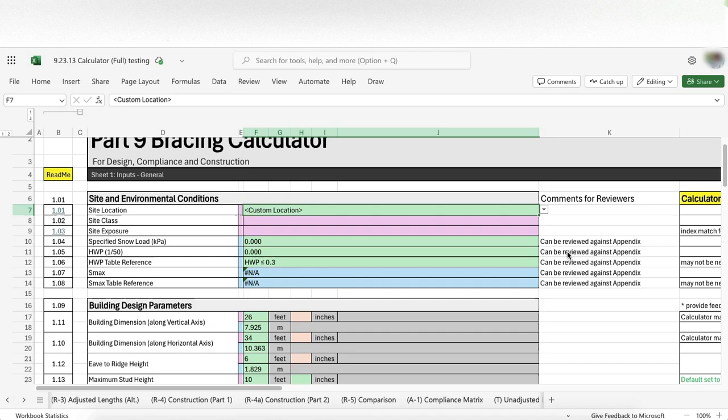The calculator I'm sending out for testing is going to be limited in some of its abilities for a few different reasons. I'll go through them as we get to it, hopefully it'll make sense. Basically, I'm trying to limit it so people can get a handle on the way it's working before I get into the more complicated logic. This is just a test phase, and please understand there'll hopefully be more options coming that provide more versatility to different users. So please just jump into it.

As I go through some examples here, I've already produced a demo version that I posted to YouTube last week. This video might be a bit more ad lib, and I'll go through some of the back-end data on how it applies to the code and some of my thoughts on these processes.

I apologize if it's a little long-winded, it takes a lot of my brain power to sit down and say all these things out loud, so thanks for your patience. I'd recommend, if you're comfortable with it, toggling to 1.5 or 2 times speed on YouTube so you get to the words a little quicker.

As I said, you're getting a test version, but it'll largely look like this. There may be some visuals that are different, recognize that it's a test version, and some cells might not fully make sense or be completely formatted, but I'll be working to clean it all up.

The general premise is there's a bunch of sheets down here that the user can navigate. There's the instructions and README - these are not finished and won't be finished on the test. You can take a look if you want, but there won't be much information there. I demonstrated that functionality in my previous demo, but haven't really built it out.

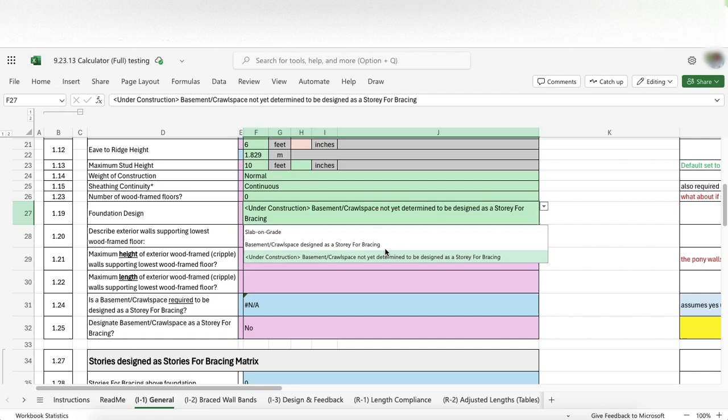So the logic is there, I've built it into the calculator, but in terms of testing before we get to this point, I'm just going to lock this all out, so you're not going to need to navigate through that just yet. You're only going to have two options: slab on grade, or the basement designed as a storey for bracing.

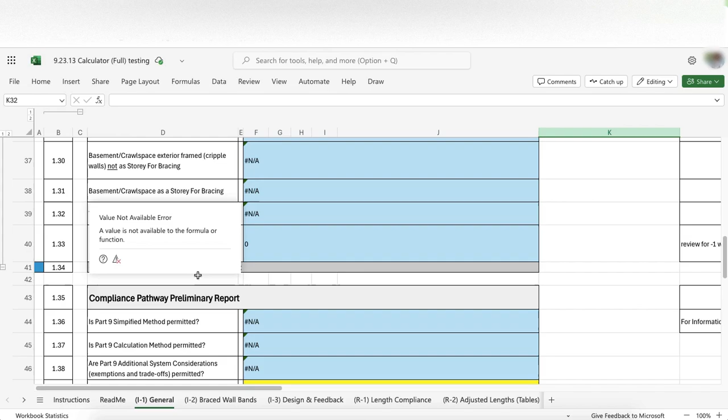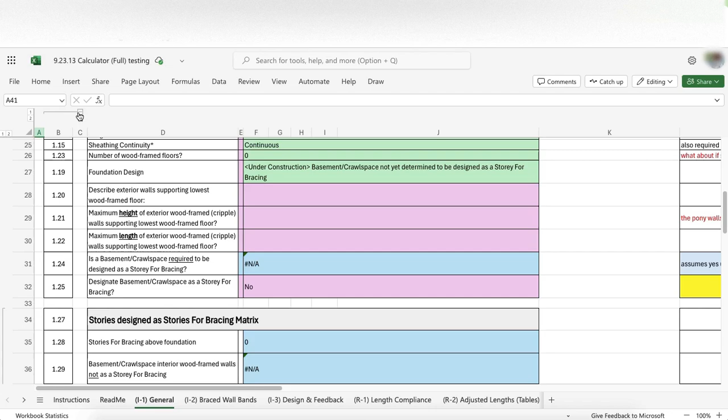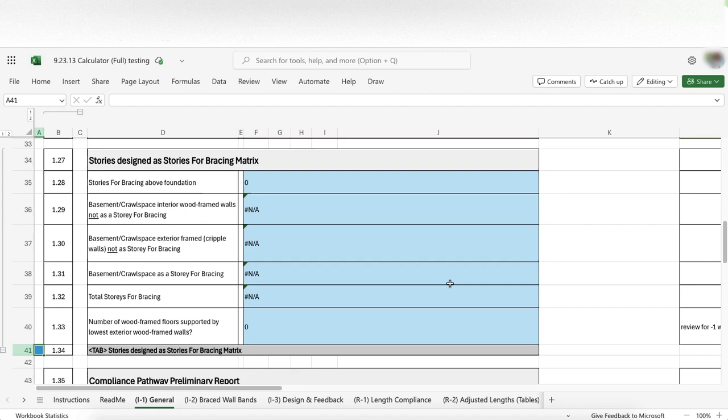You can check into all this stuff yourself if you like. As a general comment while navigating through the calculator, whenever there's a blue square like this, that represents a way that the cells can be condensed. This table isn't necessary for users to navigate through, it's helpful for understanding how the calculator logic works, so it's still available to see, but you can minimize it here and reduce it. That same thought applies on all the pages - if you see a blue square, there's usually a way for you to condense cells. I go through this at length in my previous demo, so I won't cover it here.

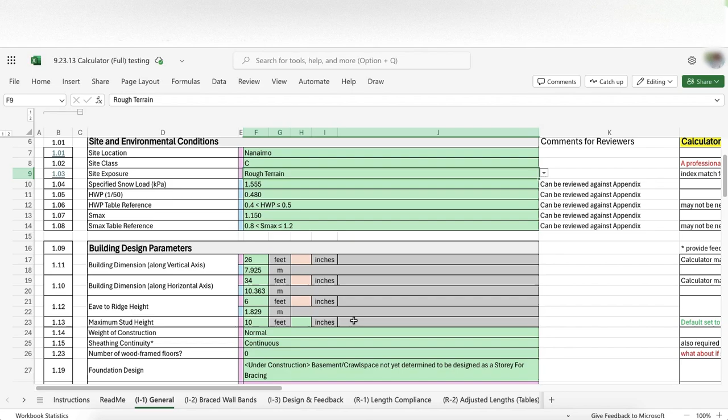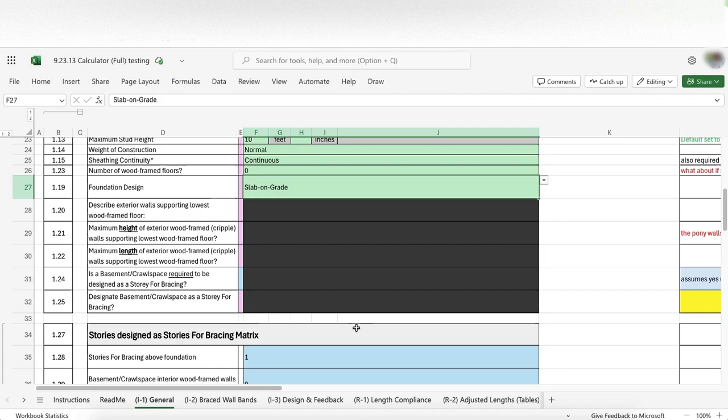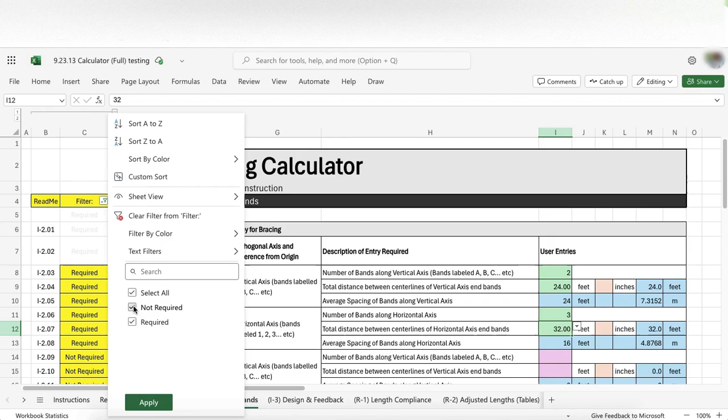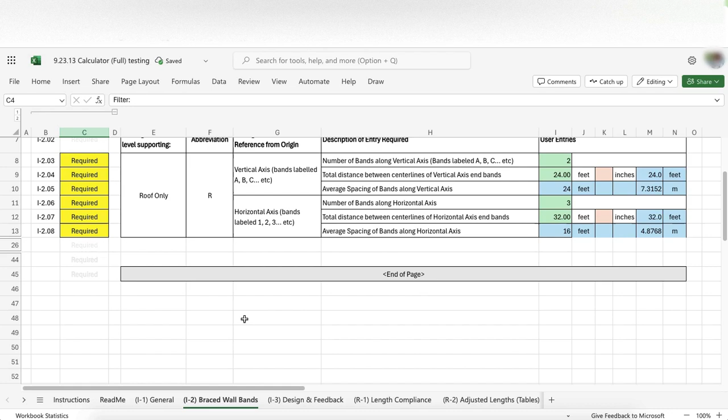So I'm going to keep putting through an example. I've already entered in some information here. Everything's blue or black, and I can see what compliance pathways I have available to me, so I can jump onto the next page. Again, I can apply this filter - I talk about that as well in the other demo. I've already entered in some information here regarding the number of bands.

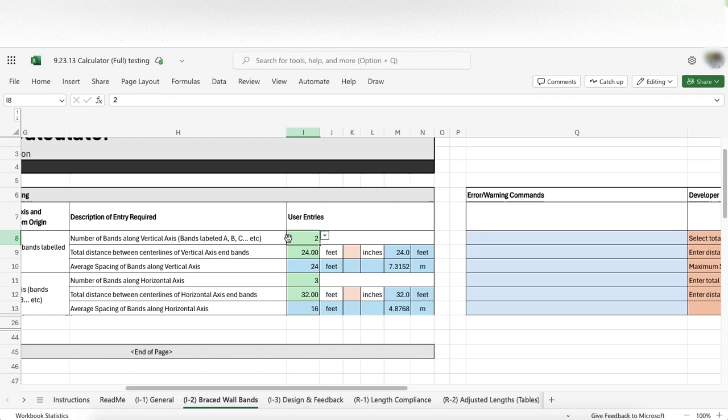I'm not sure if I have the functionality in at the moment. This isn't very well formatted yet, but if you're interested, think about these kinds of ideas as you move through here, because once the logic's written, it's pretty easy to provide this kind of feedback to a user. For example, in terms of the rules of 923.13, there are limits on the maximum spacing of bands, and it would be possible in the logic here - I think I've done it - to actually build this out a bit. So say we have two bands, but say I have 40 feet between the bands, I was producing an error notice here.

The maximum spacing for a band in the code is 10.6 meters for stories that are required to be stories for bracing. So it's possible to write in this kind of feedback for the user to get some immediate response. It's easy in this case - it didn't actually apply to my design, which is why it wasn't coming up.

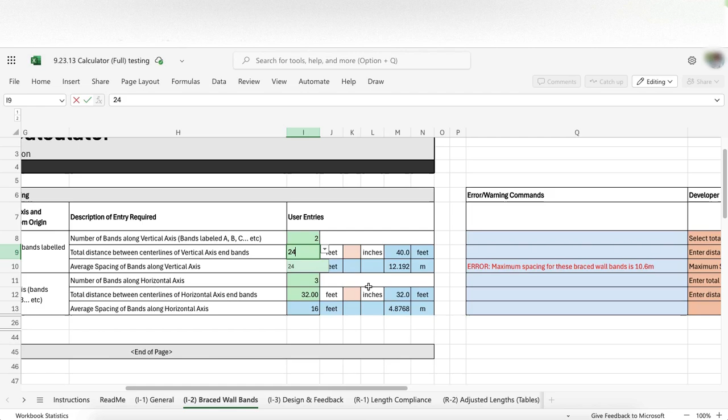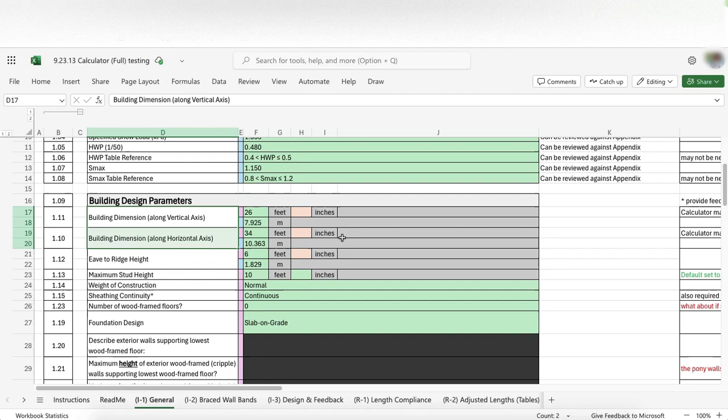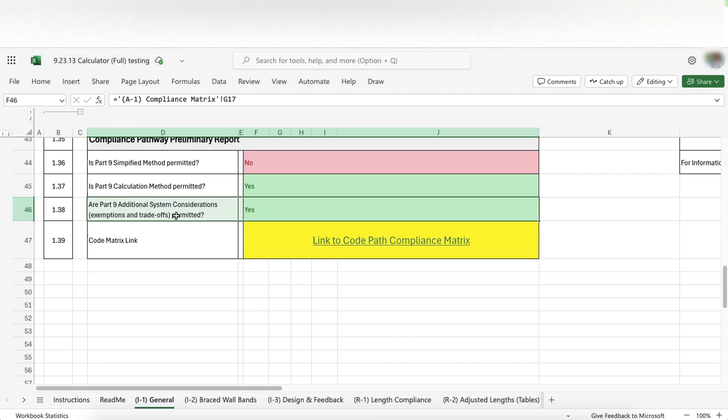Another thought I had - sorry, just jumping back to this page - when we talk about building dimension, there may be impacts on how we calculate building dimension, whether or not these additional system considerations are permitted to be used or not. So I would like to have some feedback that comes back to the user here regarding whether these dimensions should or shouldn't potentially include things like covered decks.

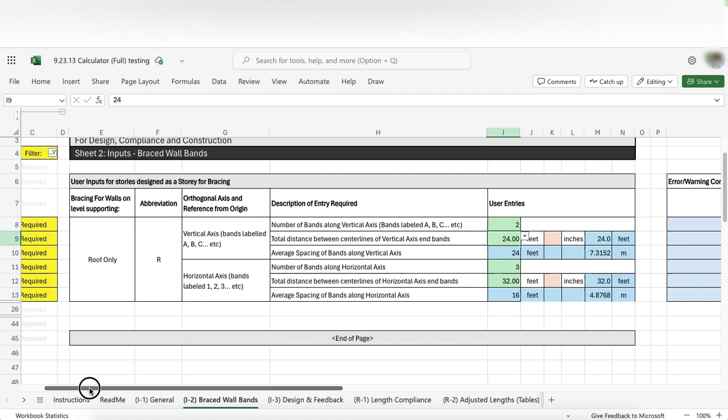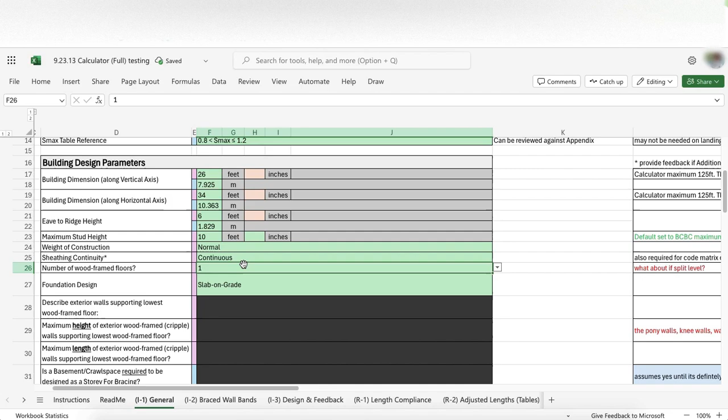Yeah, so again, once everything is green, we can keep progressing. I'll just let you know that if you're navigating sheet to sheet and coming back here, or reusing the same spreadsheet to produce a different design, keep in mind - say for example we're currently only designing for a roof only, but if I was to come back to this spot and change this from a one-story building to a two-story building, and come in here, because I've already applied this filter, the page doesn't automatically update for required inputs.

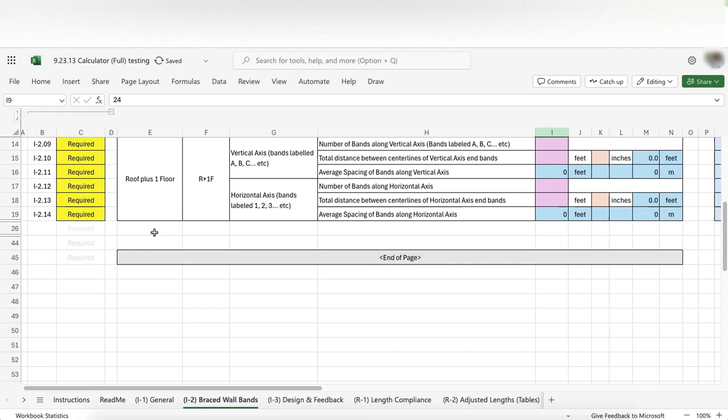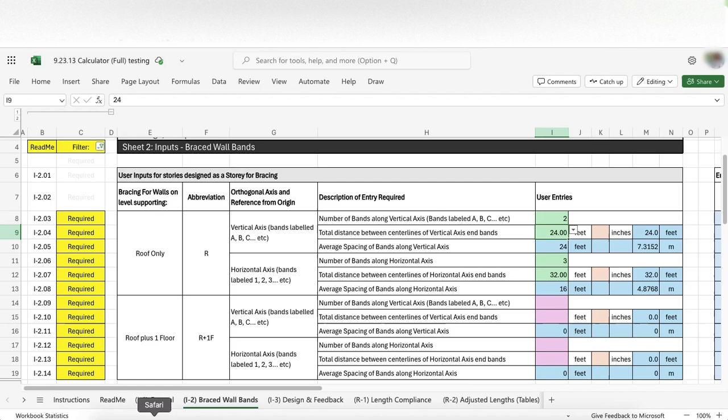So you would have to come back to unrequired, not required, sorry, and then back to required so that these fields became available to you. Just be cautious as you're testing things and playing around with it. My process is that every time I come to a page like this, if I'm not going through the process from the very beginning straight through, I'm always checking to make sure the required fields are becoming available to me. But I'm going to go back to change this to 0.

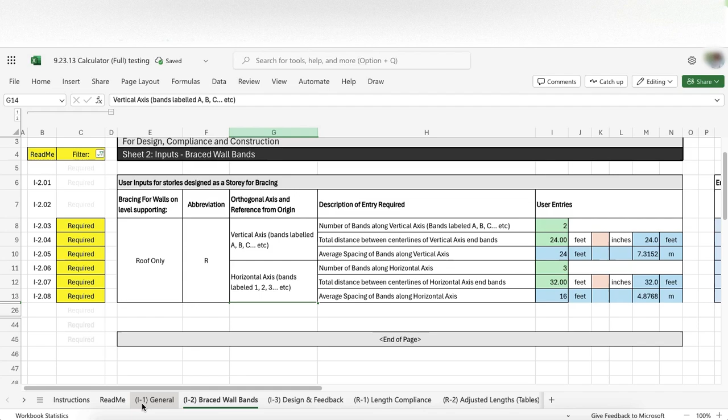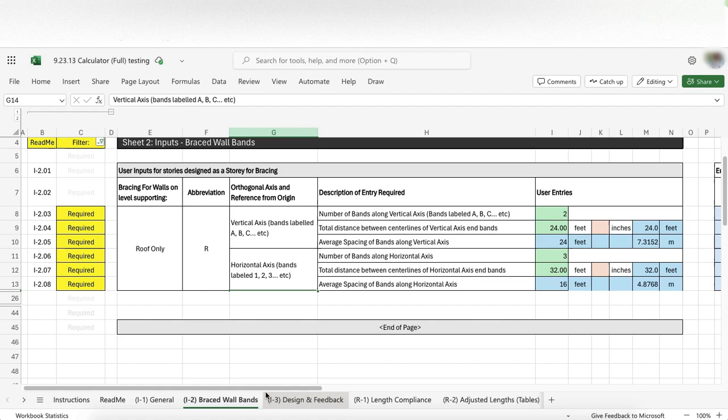So yeah, I'm all good here. I've got a pretty simple building in terms of its size and dimension. I'm going to go through to design and feedback. You see, I've already been playing around with this, so I've got a bit of information entered there. I'm going to do that same process again.

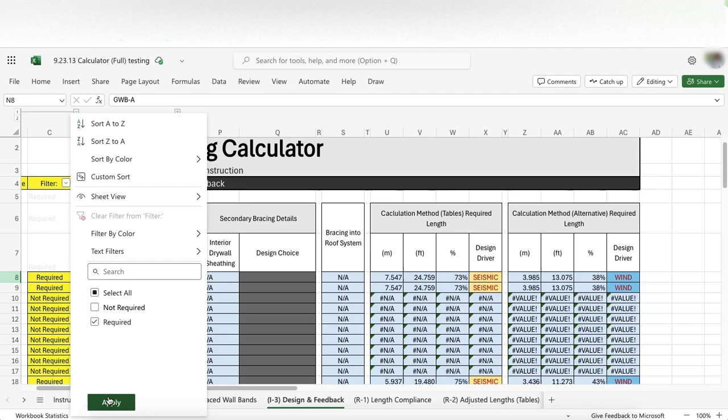And I'm going to delete all of these. I'm going to put these all in for starters as WSP-A. You can, and for some reason I have a hard time with it, but you don't want to do that. I don't know if it's just my mouse or my inabilities.

Something I just wanted to quickly show is, say you're producing elements of your design for the calculator to review here. Say for whatever reason you're getting a length that is insufficient for your design requirements, and you want to change this reference framing type. Or it could go otherwise - say you're trying to change this reference framing type, and you've already made a selection here. Say for example you change it from WSP-A to GWB-B.

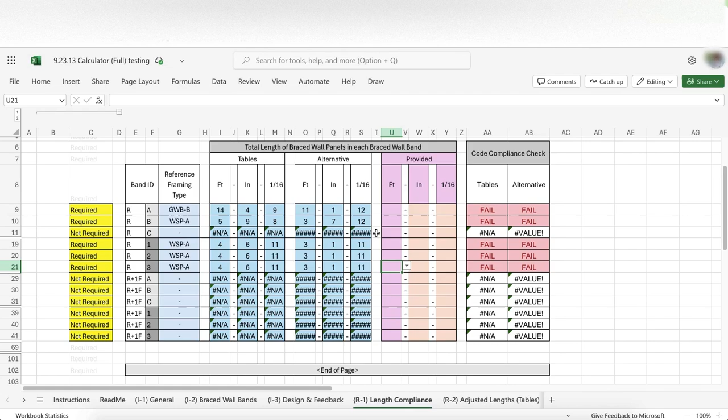This one was all pretty straightforward. Again, if you're interested, take a look back at the demo that I did to understand the intention behind this sheet. I will quickly say that...

Yeah, I think there could be merit - this provides for the overall total bracing in each brace wall band. I really think there could be merit in somehow splitting this up into another sheet for designers, where they enter in the length of each brace wall panel in a brace wall band. That logic is probably going to be pretty simple to devise. It could just be a helpful step where designers are putting in that information as they're reviewing their drawings in combination with the design.

If we have that information in the calculator, it will also be really easy to pull it out and export it as a report for builders, so that when their framers are on site and looking at a particular brace wall panel in a brace wall band, we'd be able to pull out specific information on the construction requirements. For example, based on the spacing for required anchor bolts, how many anchor bolts are required in that specific brace wall band, brace wall panel. The same thing could apply for nailing requirements for the sill, for example. There's a bit of information that could be pulled out that's already existing in the calculator, but we could apply it to very specific brace wall panels.

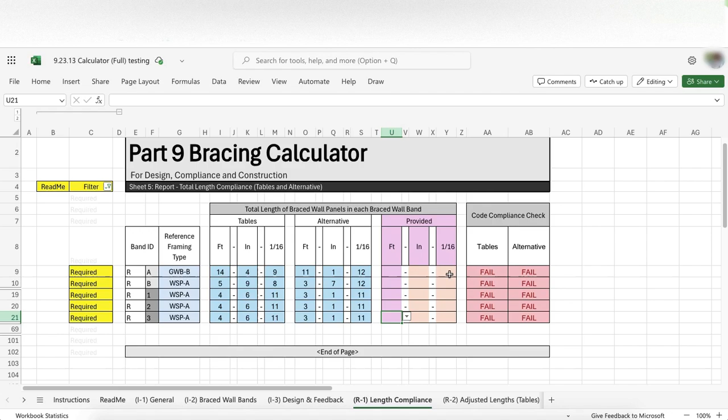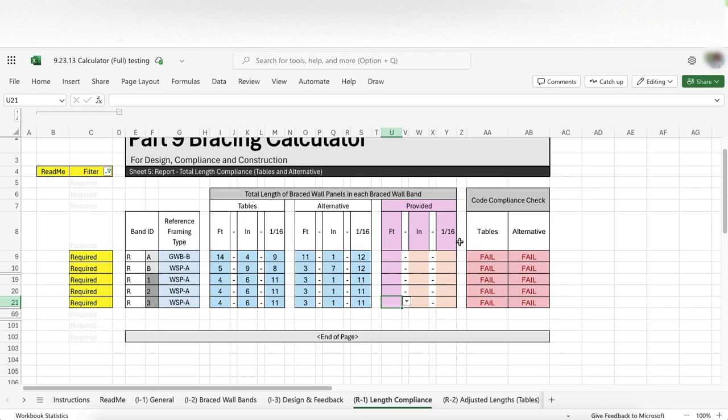Entering in the information here for the provided total bracing length in each brace wall band doesn't have any further impacts on the calculations. It's purely just for this table.

So now we're starting to get into some of the more technical information and reports. For those reviewing the technical aspects of this calculator, checking if it's actually producing calculations that truly reflect the values represented in the code, this is one of the pages that is going to be helpful, which is why I thought it would be most helpful for building officials, because that is essentially part of a plan review. The idea here is that the designer has entered in the information that is important to them. The calculator has queried the building code and the building code tables, and it is producing that information so that a building official could review it.

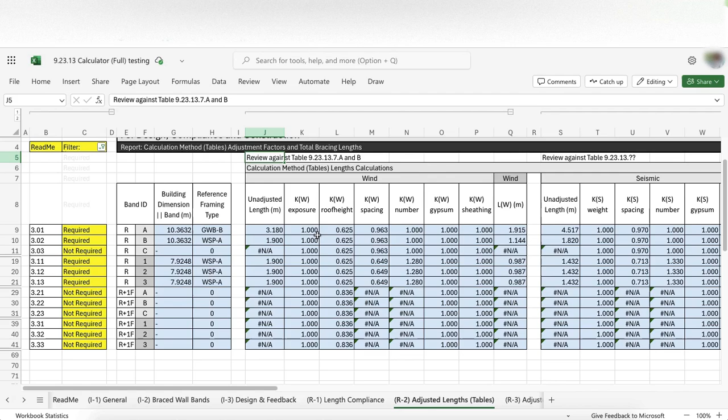Now, I've made a couple of notes here, and I'll probably leave them in for the test. But all of these values can be reviewed against the tables in the building code. There is interpolation that takes place for a lot of these, some of them not. But that's how, if you are testing this and you're curious about how effective it is, you're going to be thinking about these values in relation to the building code tables, and I'll jump into them a little bit.

I've written them up here. So this is the calculations for wind against the calculation method tables. The wind ones are represented in 9.23.13.7.A and B. These ones, I need to fill it in, but I believe they're C and D for seismic.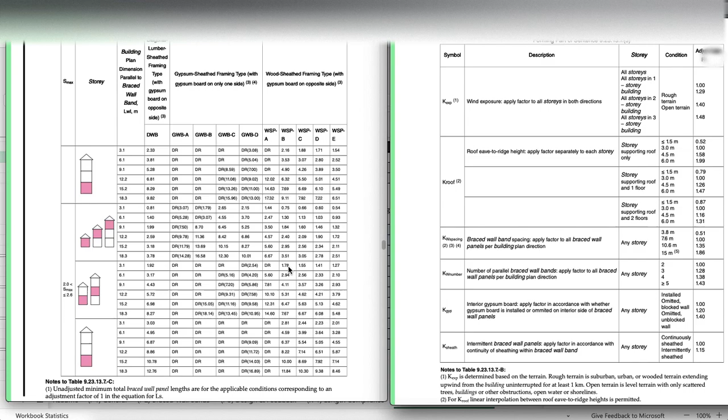And all these numbers, obviously, are a dense set of tables. You're looking, as you make a design or check a design, in terms of determining the unadjusted length, looking in these tables for values to use to determine that.

The same could be said for Table A, which relates to wind. It's slightly more simplified, but the same sort of concept applies. The reason that it's slightly more simplified is that the unadjusted minimum total length for wind does not have a factor related to the building length dimension.

So there's no variability based on building length dimension, because the forces developed by wind on a building are unaffected by a building length parallel to the bracing. Anyway, that's kind of long-winded, but it's just a simpler table in the end.

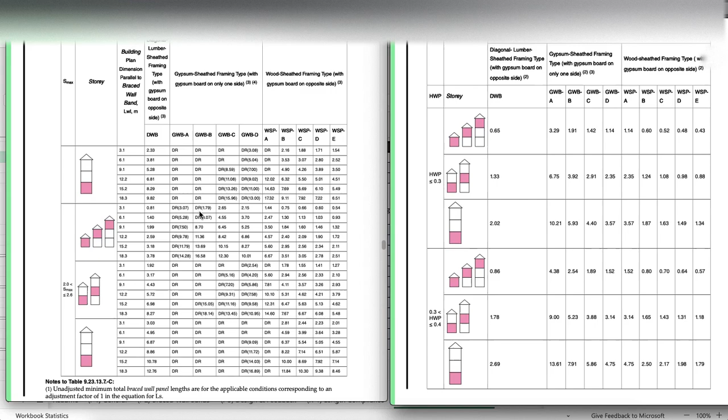Whereas for seismic, absolutely, the length of the building parallel to the braced wall band has a massive effect on how much bracing is required in that band. So yeah, these tables are more complicated, but they're all there, obviously.

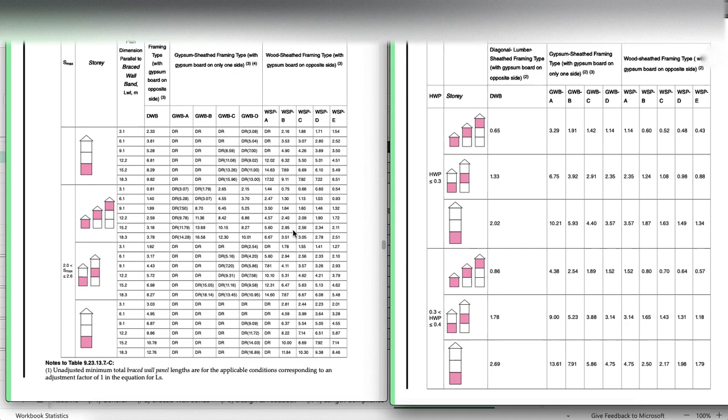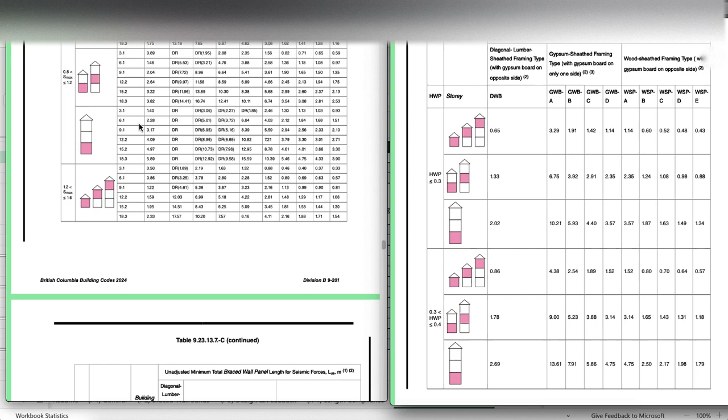For those testing it and wanting to see if the values that are coming back are accurate, we can jump into this a little bit. I'll do that right now. On our design that I'm demoing on the calculator, we have an S max value in the range of, I think it's 1.55. Just double check.

Sorry, just jumping back here. Yeah, so we have an S max value of 1.15, sorry. So we would be in this bracket here, right, with an S max value of 1.15.

The building that we've designed is only a single story, so it's only the wall supporting the roof, so it's going to be this set of tables here. And I believe I referenced WSP-A as the only reference framing type.

Okay, so single story, walls supporting the roof only. We've got our building dimensions parallel to the band, we've got our reference framing type, and we know our S max value, so we can jump back into the table. Here, we're now looking in here, primarily at this set of values. What the calculator is going to do for us is interpolate these values based on our building plan dimension.

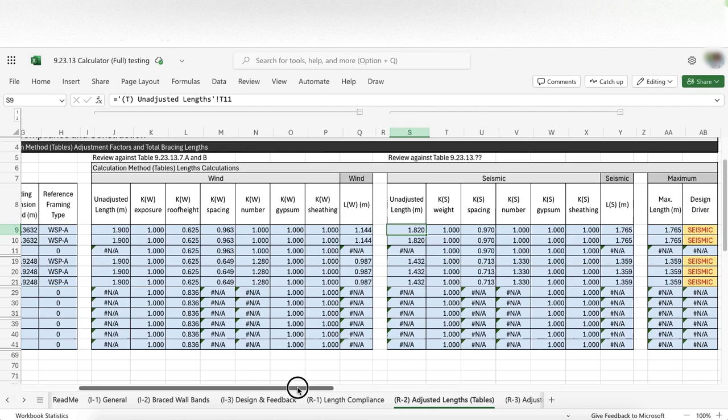And so, if I go over to here, that is what is coming back with our unadjusted length. Now, I should say, in this case, our unadjusted length. And again, we can even look at this in more detail if we're interested to check the calculations. So come through here, we have our table of unadjusted lengths.

This is back-end information that the calculator pulls out to help a user verify their calculations. I've made some adjustments to the building code tables you'll find at the end of the calculator, because there are ways to represent the logic of the tables that the calculator can understand. One of those ways is producing limits on the table. These don't actually exist as values in the building code table, so these numbers are a little bit different. Anytime I've done that, I've tried to italicize it to reference that there are assumptions going on to make it easier for the calculator to understand.

Let's take our first line here. As I said, our S max value is in this bracket for our tables. This is our band dimension, it's 10.36 meters, let's say. And we remember that we're using WSP-A.

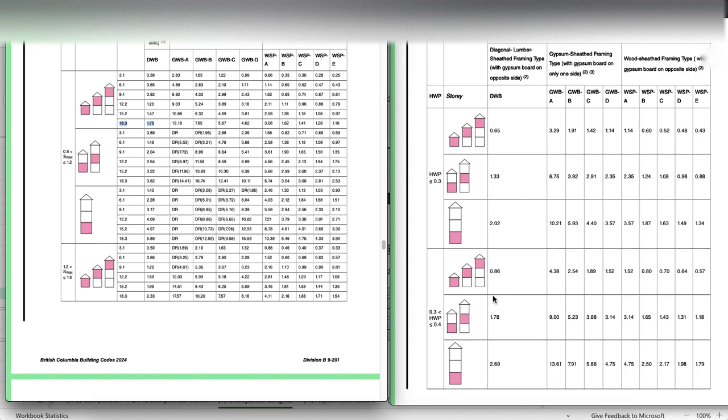The same process happens for the wind tables, represented pretty similarly. I won't go through the same process here, but basically the calculator is doing exactly the same thing. It's taking the information we've provided in terms of what story we're on, the information related to the hourly wind pressure based on the inputs and appendices, and also our reference framing type, then providing a direct calculation for that.

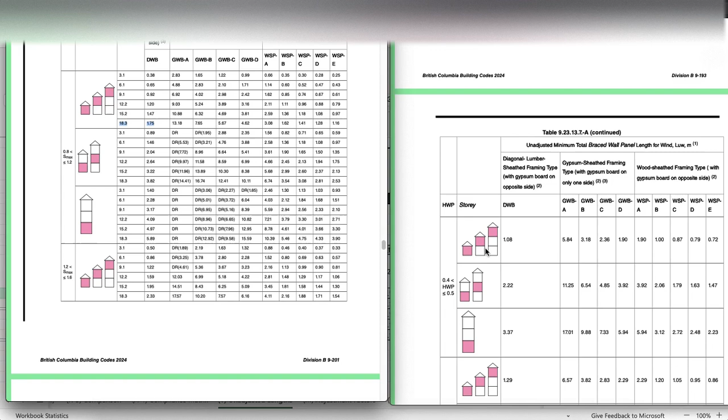Now let me just look at this quickly—we've got 1.9 again. The only things dependent here are the wind pressure, so we're in this bracket between 0.4 and 0.5, and in WSPA—if we look at that table, 0.4 and 0.5 is here, we're on the uppermost story, WSPA is 1.9. So that's where that value is coming from.

There's a bit more information here in terms of how the calculator is calculating the unadjusted lengths for the tables method. Maybe more information than most users will need, hence why when we were looking at this report, we're just throwing back the actual value. You can dig into this number more by going further into the tables.

These values represented here are all considered factors in the building code. There's a concept with the lateral bracing subsection where we have these factors, or this sort of reference house, that was probably the basis for understanding the application of the CSA standard to Part 9 construction—it became like the reference. Any parts of your design that match the reference design are given a factor of 1.

Essentially, if the factor is 1, it makes no difference on the unadjusted length. If your proposed design strays from the reference house, the code will either require a factor that produces more bracing requirements, or give you permission to reduce the bracing requirements. So the way that's represented: this factor is 1, but for example here the factor for wind for roof height in our design is less than 1, presumably because the roof we've designed is proportionately smaller than the roof in the reference frame type. That can be reflected here.

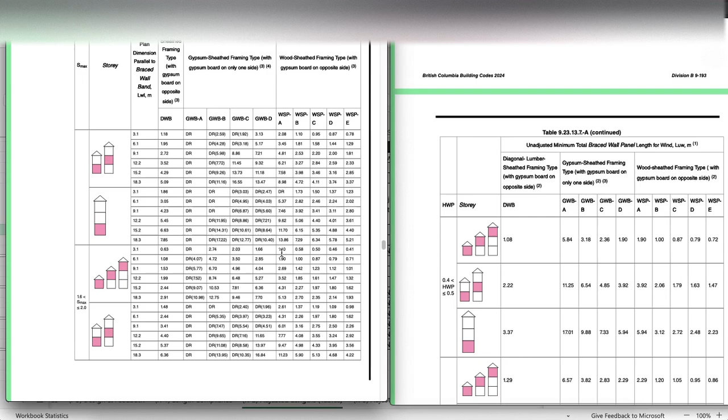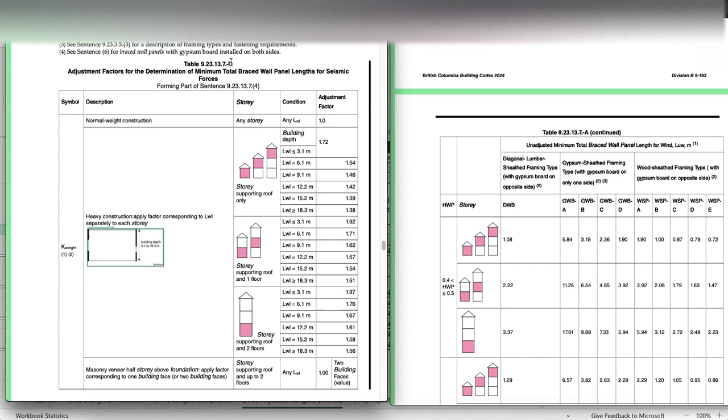These factors, we're referencing them against the building code, in the tables after the unadjusted lengths table. So for seismic, it's table D, and for wind, it's table B.

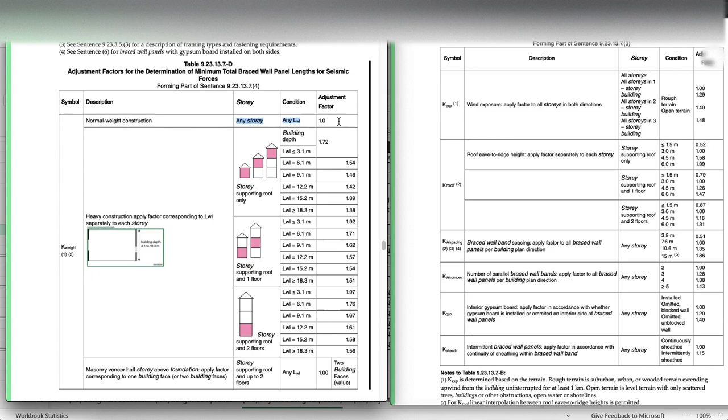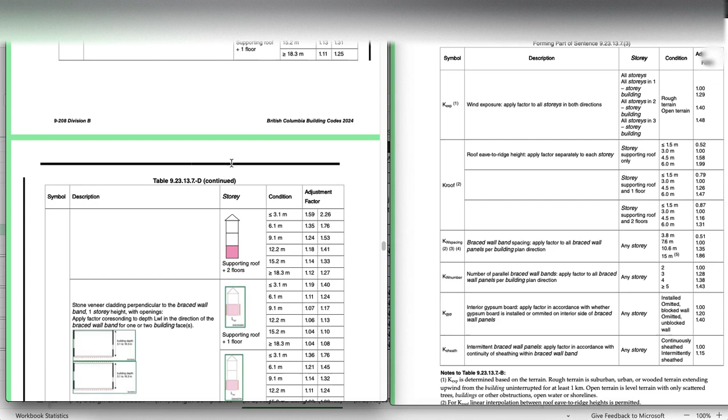We're only using normal weight constructions, so in this case our adjustment factor is always going to be 1. It's more complex systems around bracing systems, or building types using heavyweight construction or heavy cladding materials. So this is all to do with the cladding, and we will get to that, but maybe not today. So anyway, we're still on the seismic factors.

As you can see here, this is the name of the factors, how it applies, what it means, and then the different numbers assigned as factors based on these variables. In some of these, interpolation is required or permitted. In some, it doesn't even matter. But say, for example, we're looking at the number of parallel braced wall bands — this is obviously just going to be direct numbers. So basically the calculator is taking how many bands you have in a particular direction and querying the code for this information.

For something like spacing, interpolation is permitted, up to a point, obviously. And so the calculator is making interpolation calculations based on the spacing. The same concept and idea applies to the factors for wind — again, the calculator is taking this information from the code.

If you decide to look through the tables that I've included here from the BCBC at the back end, I've had to make — I don't want to say adjustments to them, I still think they're accurately reflecting the intention behind the code — but some of this content needs to be turned into a way that a calculator can understand it. Anytime I've made those adjustments, you'll see certain values italicized or something like that, just to help the logic of the calculator. But still, when you're reviewing these things, or if you want to check them, you can look at these numbers and check them against the different options available in these two tables. You can perform your own manual calculations for interpolation, for example, regarding the ridge height here, and see if the calculator is getting the right number.

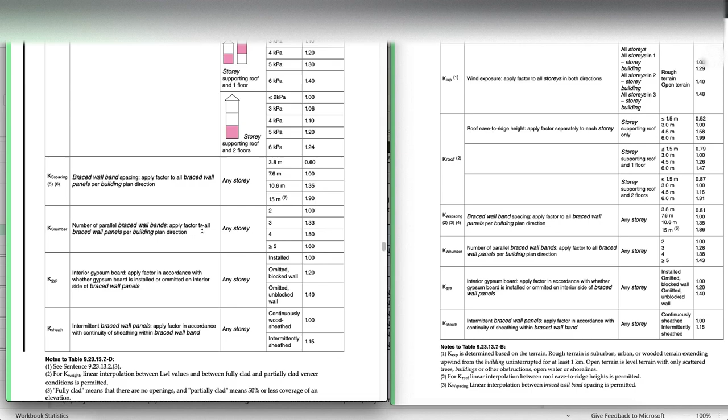As I'm going through this, I'm just making a couple of notes because there are things that are popping out for me as well. For those that are interested, that little brain moment for me was looking at this K-sheathing factor here.

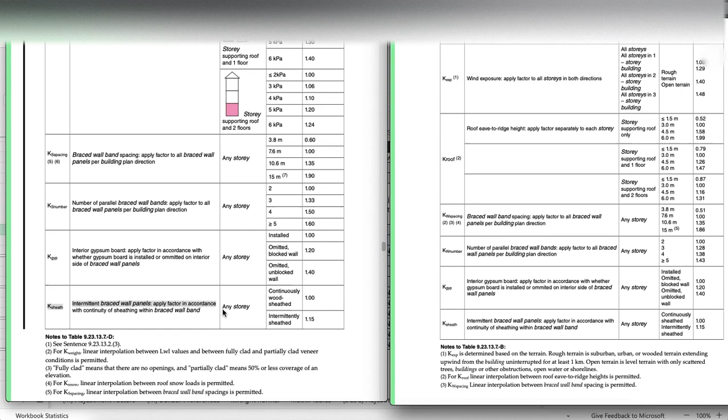So for example, in this section related to seismic — I'd originally said at the beginning of this presentation that the sheathing factor, whether continuous or intermittent, is something that should apply to the whole building. That was how I understood it to apply, and my reason for that was this here, it says continuously wood sheathed. But the way it's been presented to me is that the sheathing factor is to allow for different types of design, where people might not want to install wood sheathing all the way around the exterior because they want to put on rigid foam insulation or something like that, so you're not going to get that same bracing element all the way around the building.

Just comparing these two, I don't know - and this is a question for the code writers - whether continuously sheathed and intermittently sheathed, this sheathing factor, means something different for wind, where the K-sheathing factor is used, versus for seismic.

I have simplified them to only one component. The values are the same. You'll notice that continuously wood sheathed for seismic is the same as continuously wood sheathed for wind.

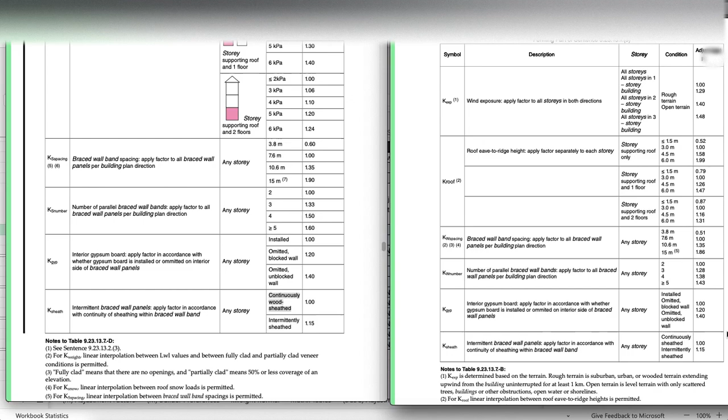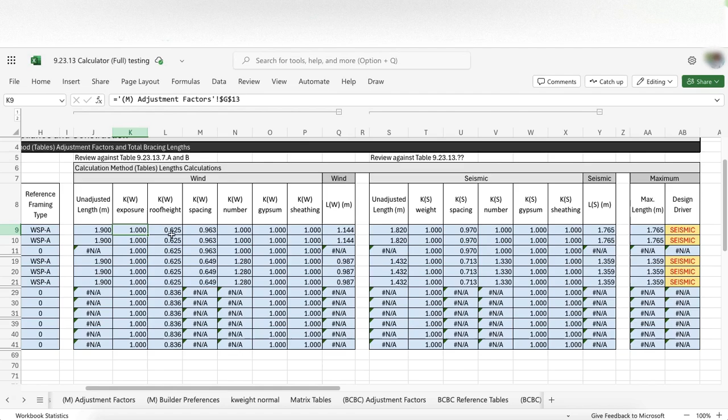Okay, so I think that pretty much explains this page and what the different values mean. We've got our unadjusted length, which is based on an interpolation, and then we have all our factors in here based on those other tables in the building code.

Sometimes interpolation applies, sometimes it doesn't. Our end result here is our unadjusted length multiplied by all of these. And that calculation is in the building code. Maybe I'll just quickly go to it.

So again, this is part of the frustration - there's so much to wade through in terms of our design.

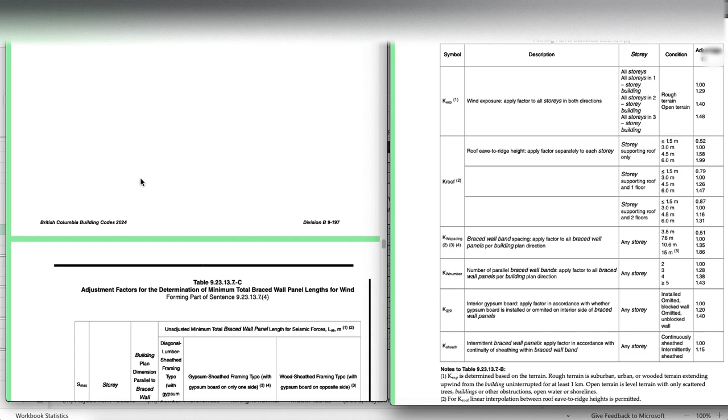Anyway, so here we're looking at, just above table C, the way to calculate the total bracing length for resistance to seismic. It gives a little bit of information here that's also reflected in the calculator. That last table I was looking at basically represents this.

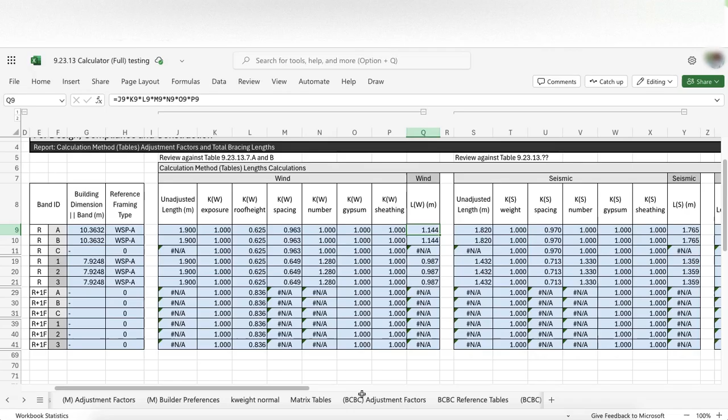If it turns out you have a brace wall length that is less than 600 millimeters, then your length is going to be 600 millimeters. That table is representing this, and the same thing happens at the top of table A for wind. I think I can move on from this one.

In terms of the alternative calculation method, I've definitely received some questions regarding this process, and this is referenced in the notes but it's not linked through the main body of the code. I'm not sure how different jurisdictions are going to approach this. It'd be great to get clarification from the code writers on the intention of putting this into the notes and why that happened, or if it's only in the notes.

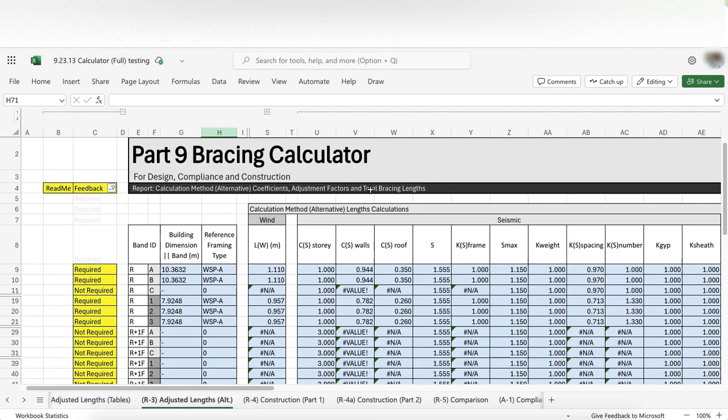I don't fully understand that, but I've included the table here so people can dig into it a little bit for themselves. The same kind of process applies to the adjusted length that comes through the tables that I had here.

Except that all these values here are produced from a combination of the factors I showed before, but then also coefficients that I believe are referenced in the appendix as well. So the same process applies - we're taking a length, and in this one I'd have to dig into it a bit, but basically we're multiplying all these factors together to come up with a total length of bracing for a particular band.

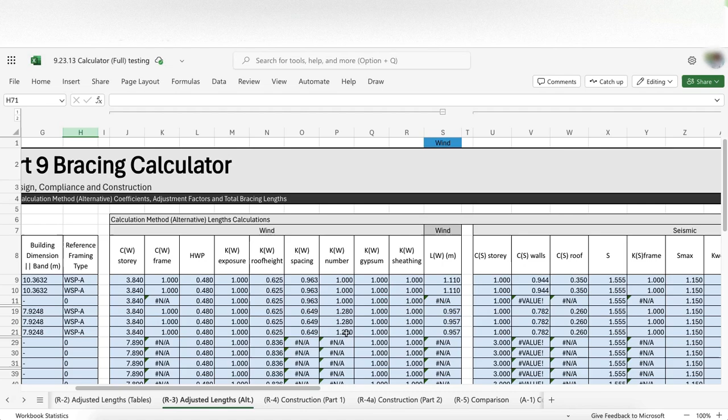Now, if you look at the actual numbers we're using here, we get quite a varied result from the tables, and I don't fully understand why that's happening. I've tried to double check my calculations, and I think they're accurate, but one thing that definitely does happen is that for our base environmental factors of our hourly wind pressure and our S max...

By using the alternative method, we are given an exact value that is found in the appendix. Now this is different to the way we calculate it with the adjusted lengths, but as you saw before, when we're looking at the tables we're looking at bracketed values. So when we consider hourly wind pressure, we're looking at a value between, in this case, 0.4 and 0.6. So the code is bracketing our values for hourly wind pressure and S max when we're calculating our adjusted lengths.

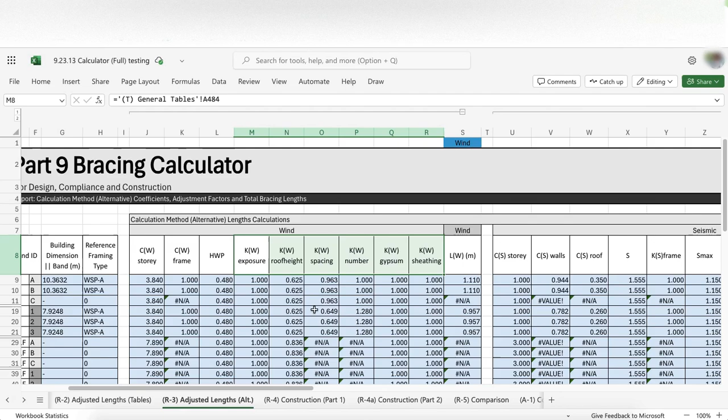So the adjusted lengths using the alternative method, among other things as I understand, provides a higher fidelity, if you like, in terms of the way the lengths are calculated. And again, all these values here can be referenced back - if they're an exposure, or like a K factor represented here, they can be referenced back to the K factor tables that I was showing before.

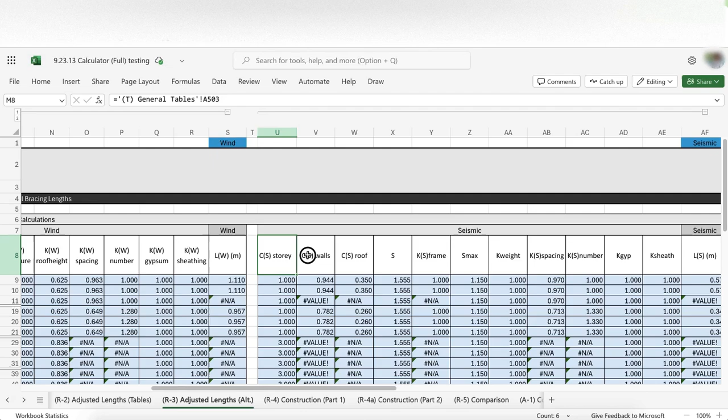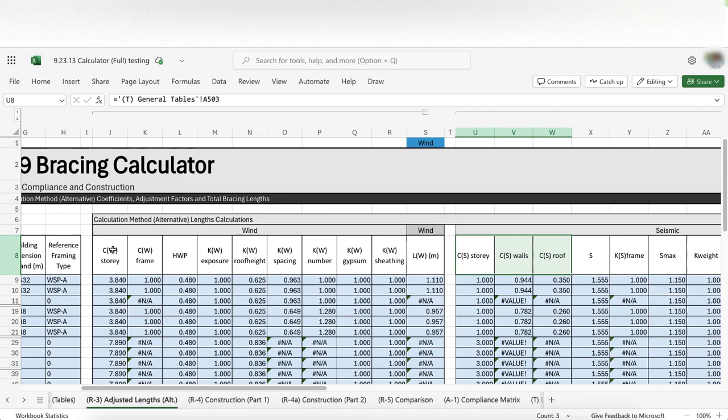All right, so there's some coefficients for wind and some for seismic, but then there are these other coefficients referenced in the appendix, or the notes. The calculator has another table that references these coefficients, and in some cases it uses interpolation, in some cases it's a direct number. I've tried to base that as best I can on the information given in the code.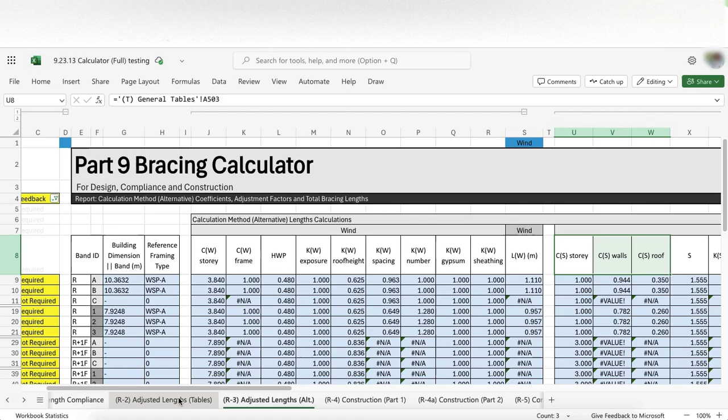So here we are, this is the adjusted lengths table. That's not what I wanted, sorry.

I'm going to jump ahead to this one called comparison. This comparison is a more in-depth comparison for the designer or building official to compare the calculation method of the tables against the calculation method of the alternative process.

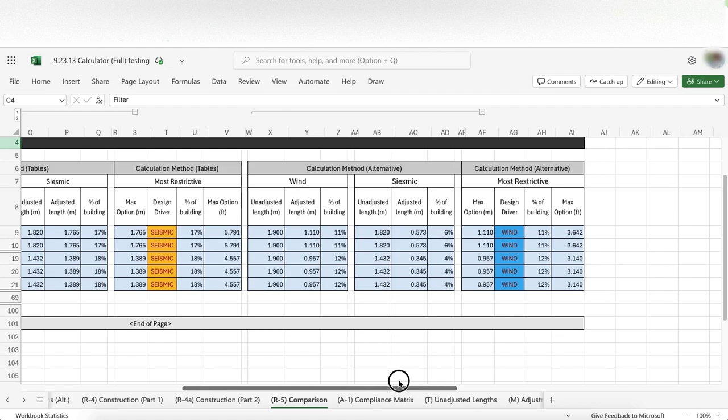Basically it outlines that when using the calculation method, we calculate for wind and then for seismic, and then determine the most restrictive element we're designing for. In this case, with our example, it's seismic. For the alternative, we do the same thing - we calculate for wind and seismic, and select the most restrictive.

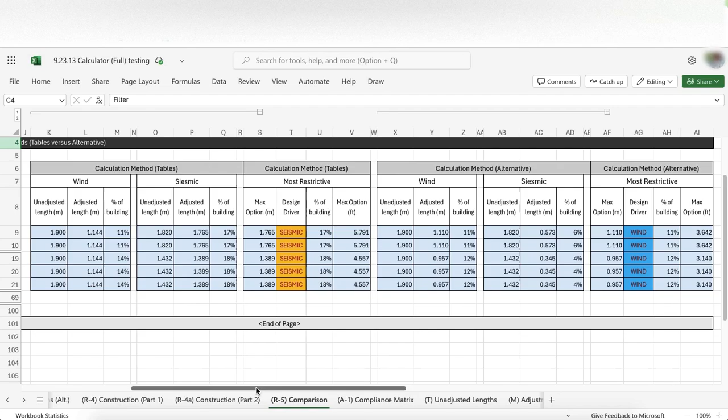Now, this option to use the alternative method is in part required in some cases. If we go back to our tables and look at - what is this one - table C for seismic.

When we start to see values here that represent DR, it means that the code writers are saying design is required, and then it points you to the alternative way of calculating this value.

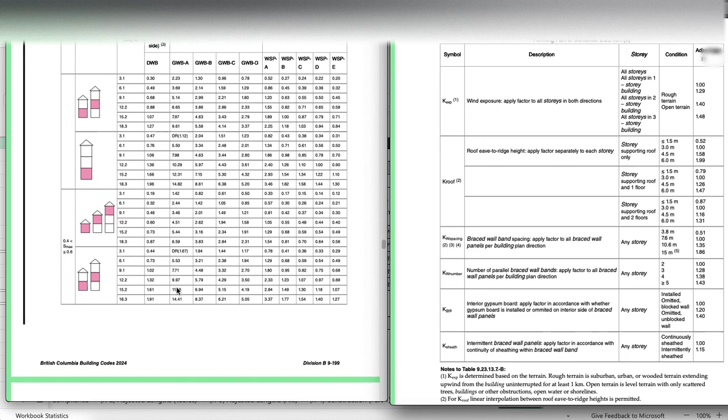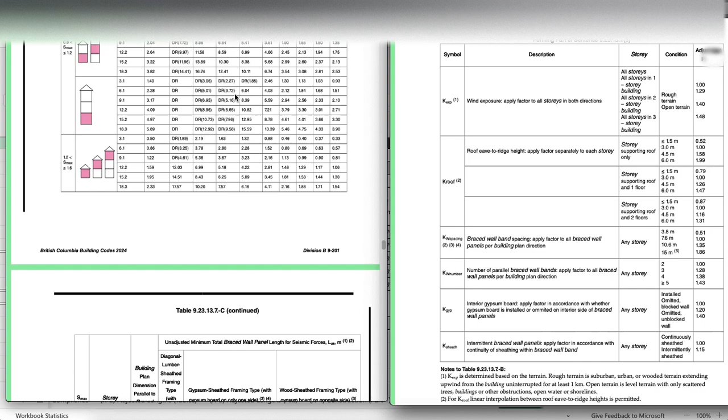And they become more apparent and widespread, these references, as the S-max value increases. So as the S-max value increases here, we're seeing more of these. Certainly as we get to the higher S-max values and the lower supporting floors, we start to see a lot more DR coming through in the tables.

Right, so even here, this is our highest S-max value we can design for in Part 9. We have 3 stories of required bracing design, and even here with a wood-based panel, WSP-A, the code is pointing us that we'll have to use the alternative method to determine the bracing length in this scenario.

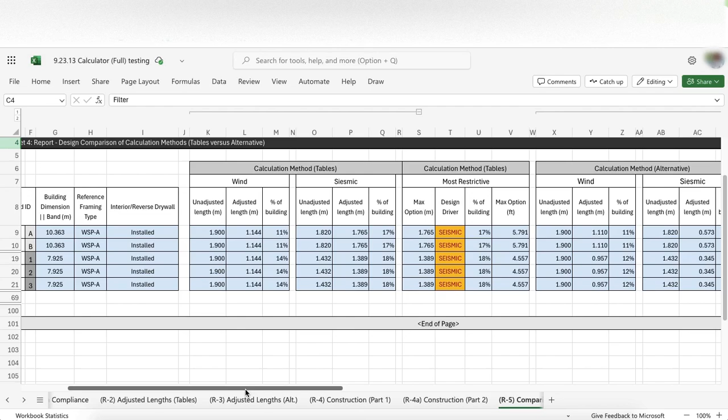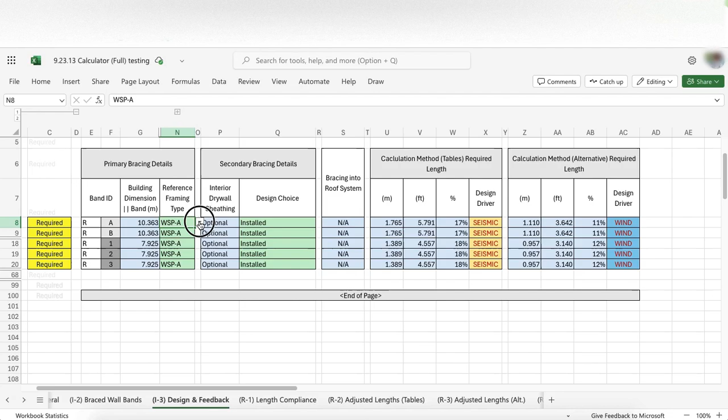Now to get that through into the calculator, let's see if I can use an example so you can see it coming through. So I'm back here at the Design and Feedback tab. We had selected WSP-A, and I'm going to change this so you see the use case.

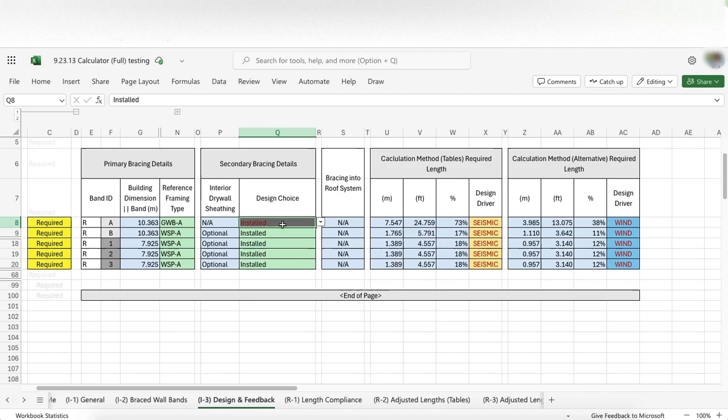This is just to illustrate something. I'm now going to change the site class to unknown, and this is going to change the S-max value - it's going to elevate it. So we just went up a bracket there. I'm not sure if you noticed, but we were on C before. Change it to unknown, and we went up here.

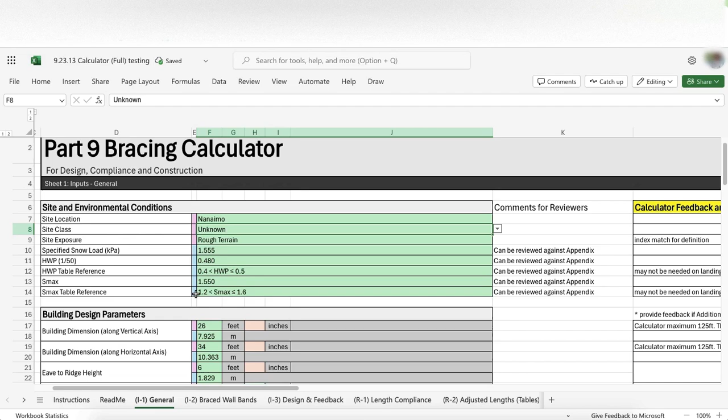Going back to Design and Feedback, for GWB-A with a building plan dimension of this length, the values for the calculation method are now coming back as essentially inconclusive, right? But the alternative method is still calculating.

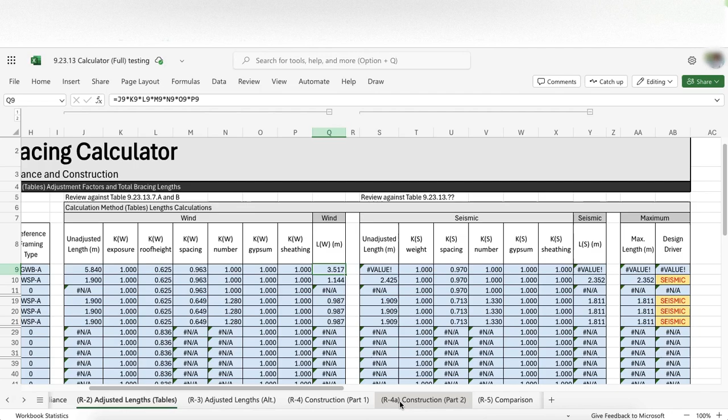Okay, and the reason for this - if we look at our adjusted lengths table, our unadjusted lengths table - these values are coming back as DR, design required.

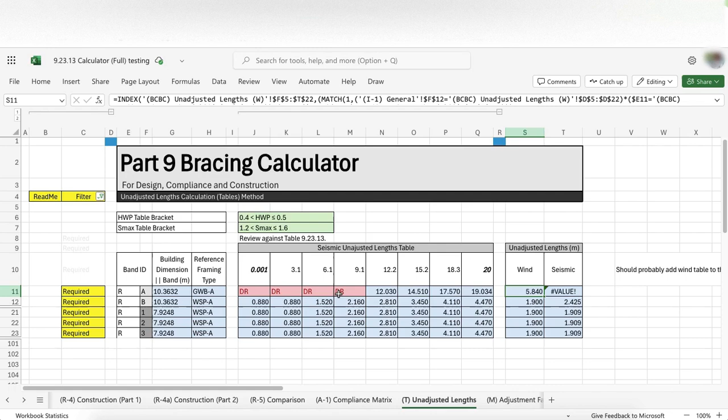If I look at here - we are so in this, 1.55, right, so this is our bracket. We're on the uppermost story, designing walls supporting the roof only. The measurement of our building was between 9 and 12 meters. We picked GWB-A, and so we're getting these DR values coming through in our calculation, in the calculation method, and that's why it's saying we cannot design to the calculation method.

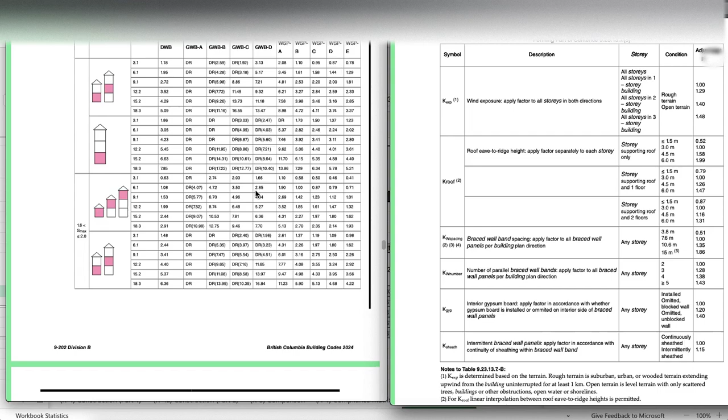While I'm here, I'll also point out that this number in brackets relates to an unadjusted length we can use if we double up an interior drywall-based panel as 2 GWB-As. My understanding is that means if there's one GWB-A on one side of the wall and another on the other side, you can use this calculation for the unadjusted length of 4.07 meters. There's also a generalized permission in the code that you can halve the unadjusted lengths - so these ones here, for example.